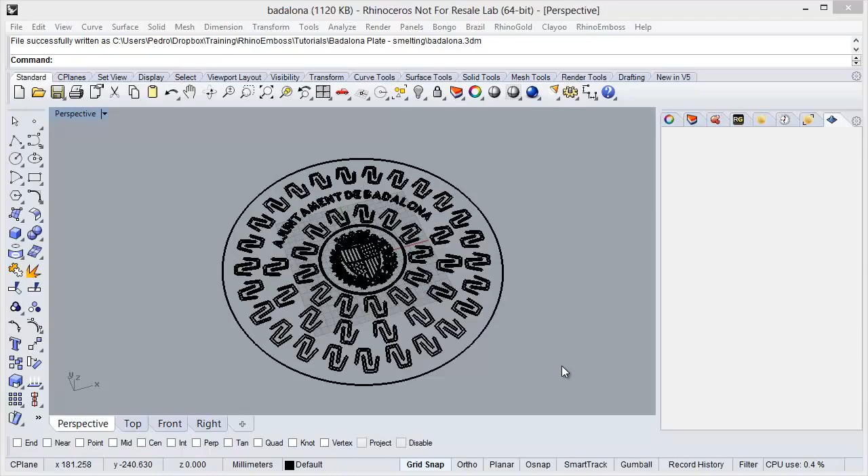Hi, in this video we will see how to create this plate using Rhino Emboss. As you can see, I have all these curves created previously, and some of them are already grouped.

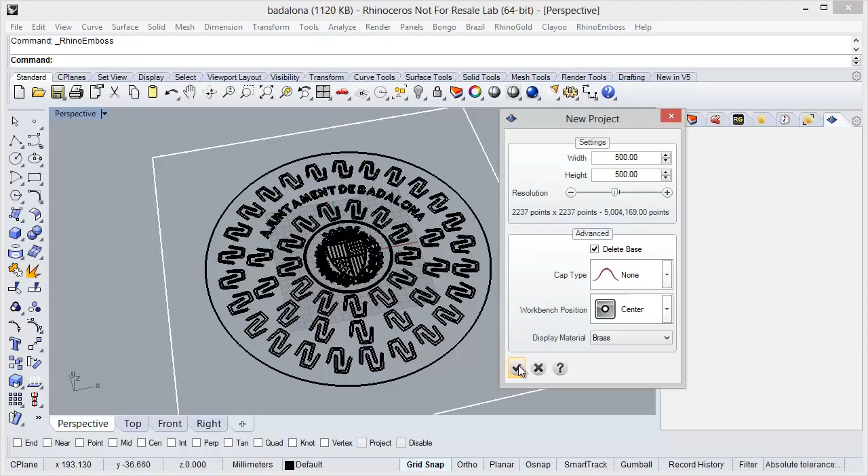Now the idea is to use the Emboss tool first to define the project settings. So I define the measures, resolution. In this case I want to delete the base, then the cap type, position and material, and finally now I can start defining all the reliefs.

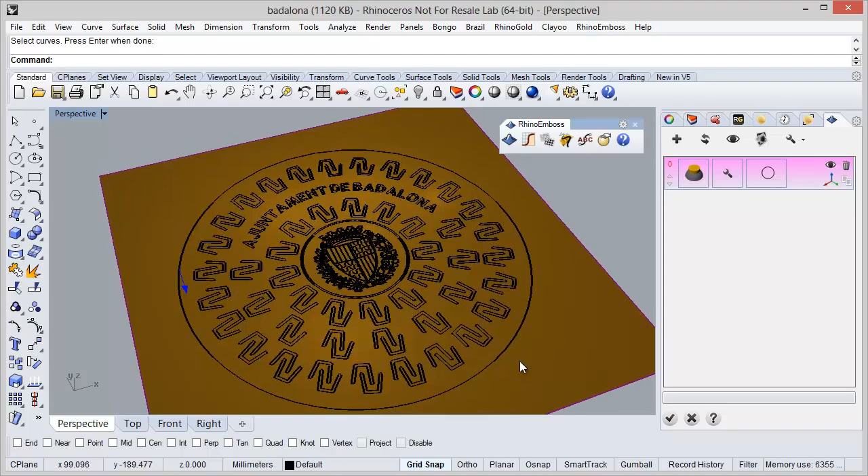So I'm going to start by adding a new operation. In this case I want extrude operation, and the curve I'm going to select this outside circle. So now I just need to define, in this case I'll define 10 millimeters extrusion distance and refresh to check the results.

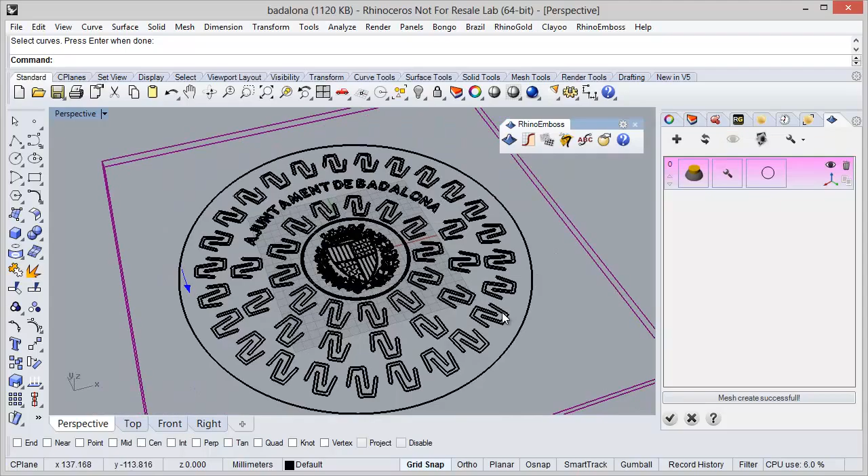As you can see, now we have one extrusion, and now I'm going to hide the results and select these groups, this also, and I'm going to show and add a new operation.

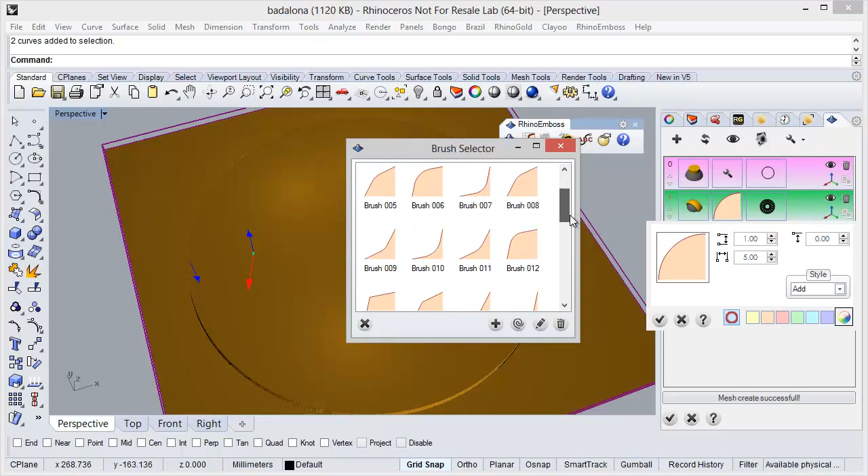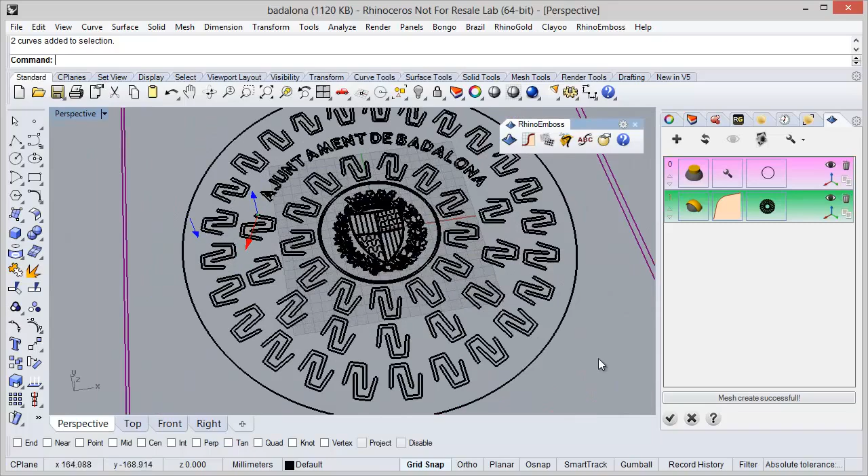The selected curves are already here, and in this case I want operation by profile, and I want to change the profile. In this case I want to choose this one, and I'm going to define 3 millimeters for the profile. So now I can adjust the gumball directly here, something like this, and now I just need to refresh to check the results.

Okay, as you can see, all the curves selected were created the relief using the selected profile.

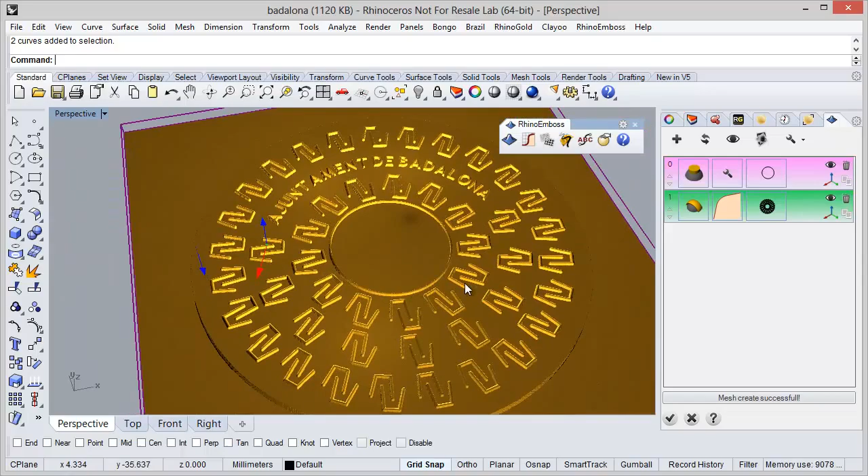So the next step, I'm going to hide the relief and select this group, these outside curves, and add a new operation. In this case I want extrude as well, and 1 millimeter extrusion. So let's try 1.5, okay, and now I just need to show and refresh to check the results.

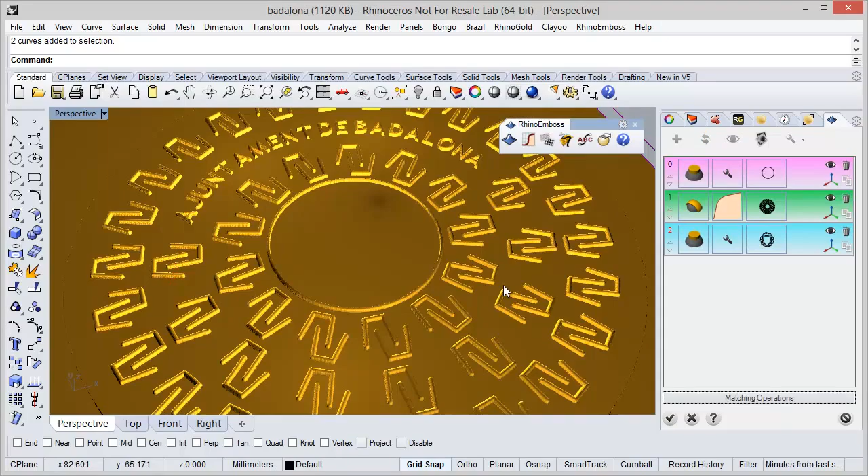As you can see, the extrusion was successfully created. Now I'm going to move on. In this case I'm going to select this group, for instance, and add a new operation by profile and adjust the gimbal a little bit in here.

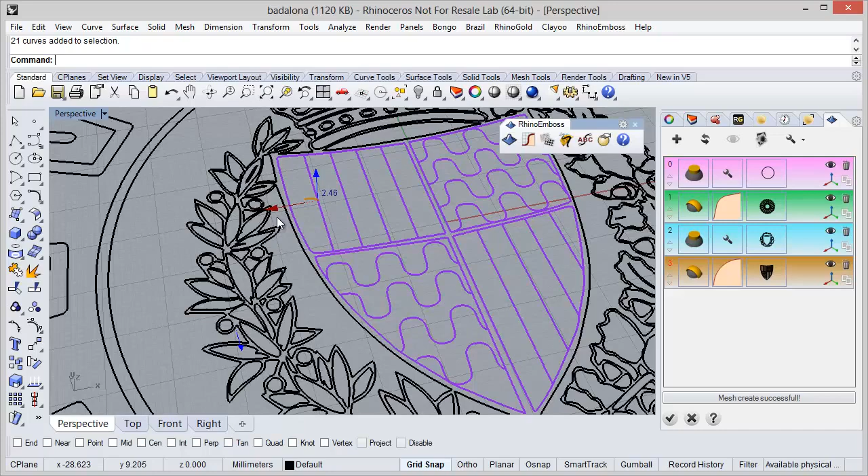In this case I want 1.5, profile 5, and just show the results and refresh to check the results. As you can see, it was successfully created.

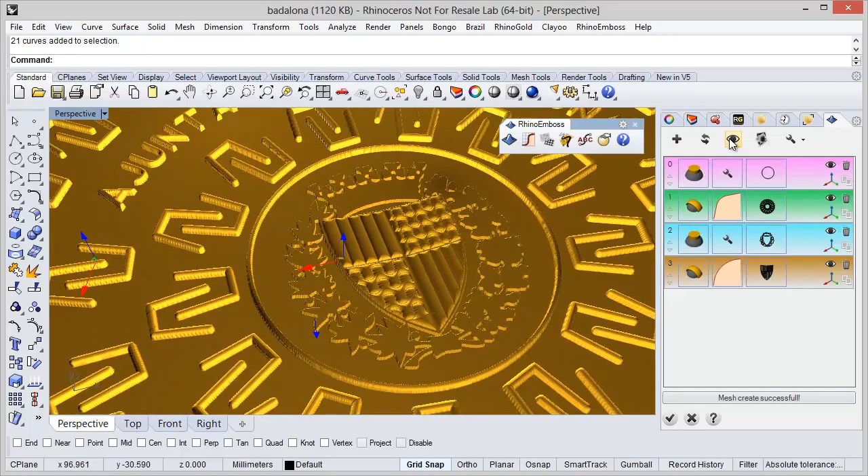Now I'm going to add a new operation, so I'm going to start by selecting the groups. In this case I want this group, this group, this group, this, and finally this one. So I've selected the curves.

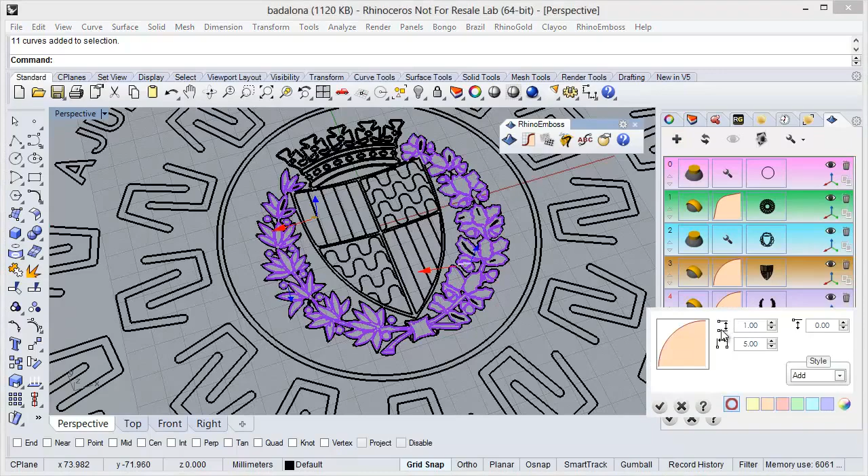I just need to add a new operation, define the profile settings. I want 1.5, and of course I can adjust the gimbal in here, something like this. Seems to be perfect, and I can show and refresh to check the results.

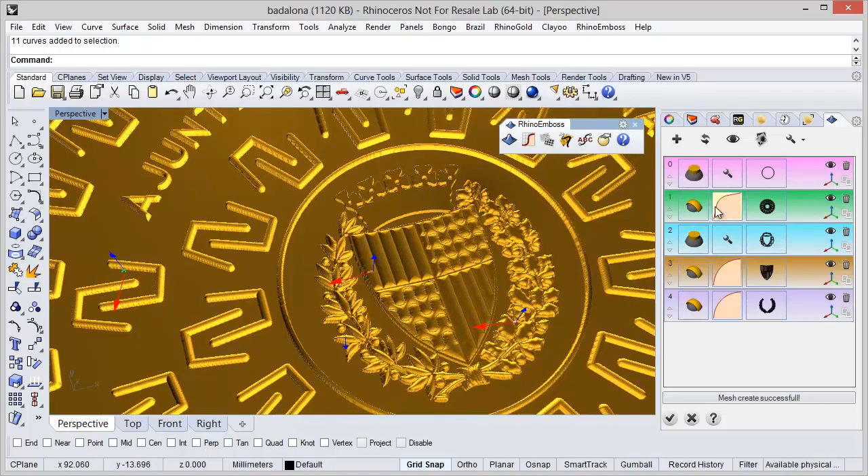Okay, as you can see, these profiles were successfully created. Now I'm going to select another group, so I'm going to hide the results and select this group and this group.

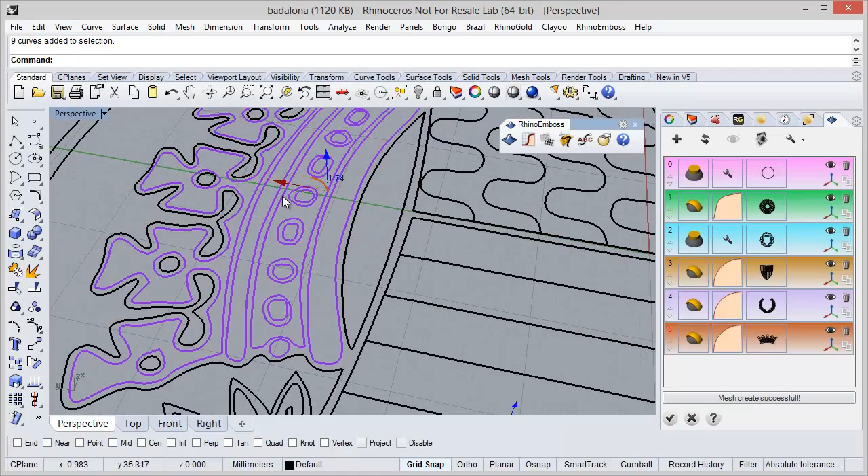To add a new operation by profile as well, 1.5 millimeters. I can adjust the profile in here, something like this, and again show and refresh to check the results.

Okay, as you can see, these profiles were successfully created.

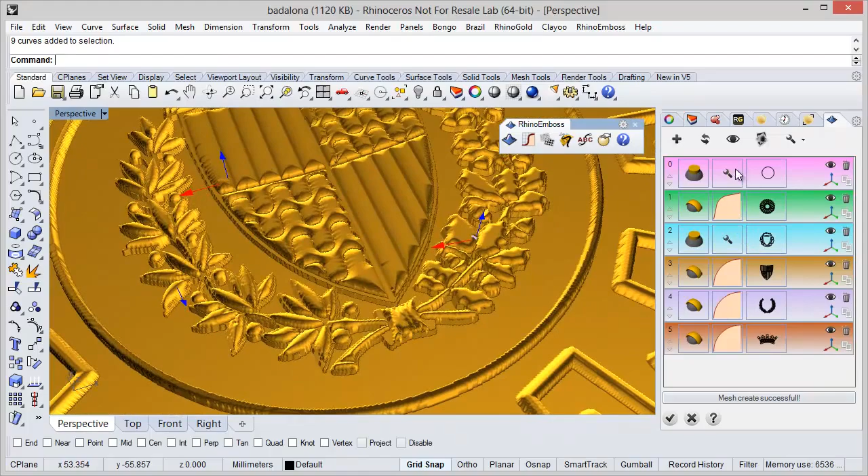Now finally I'm just going to select these ones and define a new operation by profile, but this time I want to subtract, so I just need to show and refresh to check the results. So as you can see, this is the idea.

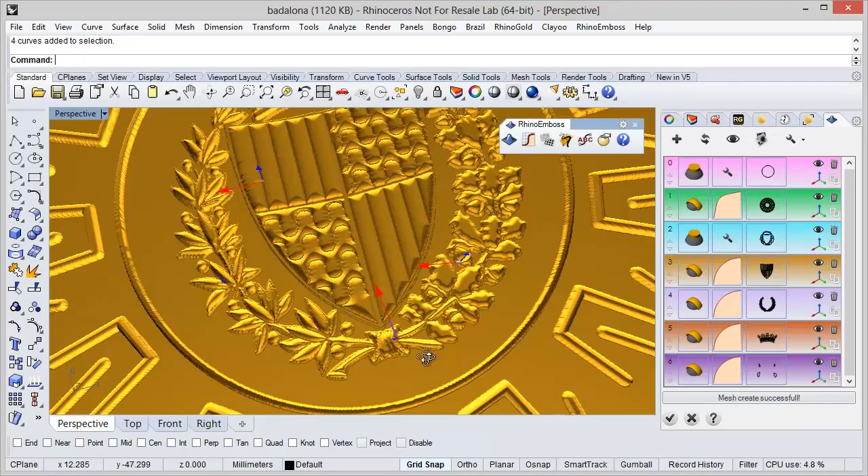You can easily create all these profiles, and using the curves I can define any kind of reliefs. So after this I just need to click in here to add this mesh to the document.

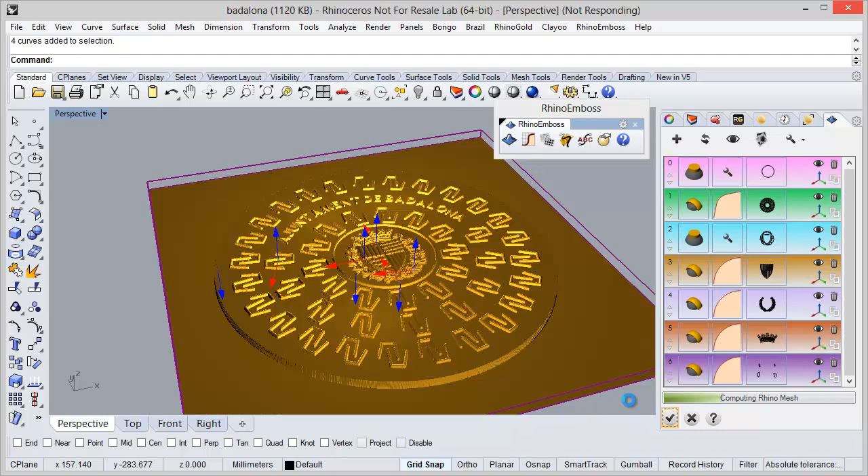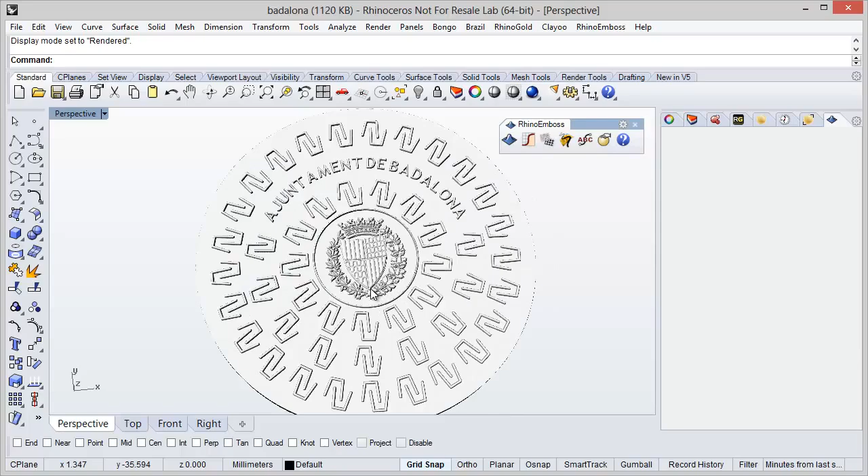Okay, as you can see, the mesh was successfully created. I'm going to change to rendered display mode just to check the results. As you can see now, I have all the reliefs created and the results are really good.

As you can see, now I have the plate defined. This is the idea. I hope you like it, and thanks for watching.